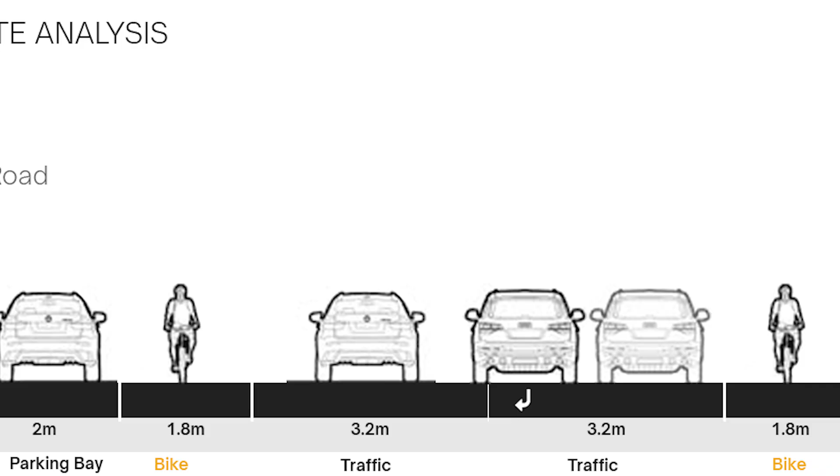Swinburne's Hawthorn campus is a key victim of this issue. Students who wish to cycle to uni find it inconvenient as they must navigate through busy streets and fast-paced intersections. Unprotected bike lanes are common. These lanes provide little separation from traffic as they are placed in between roads and car parking. From observation, narrowed cycle lanes create pinch points and hinder the experience of cycling. It causes drivers to unintentionally pass closely, which is dangerous and intimidating for new bicycle users.

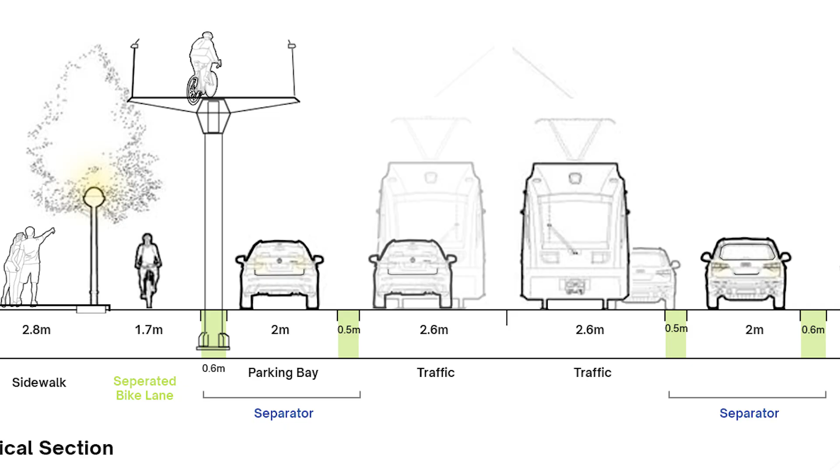Although using a buffer can alleviate this issue, one drawback with unprotected bike lanes is that they are simply painted, which does not stop people from parking or moving on them. This project addresses improving the experience of cycling within the urban environment by applying proposals to the physical infrastructure in order to create a dedicated, continuous cycling route.

The area around Swinburne campus relies on a few north to south travel corridors. Railways and train stations create bottlenecks. Major roads have limited safe crossings around intersections. This results in a disconnecting cycling network, so people naturally default to cars. In addition, the surrounding streets prioritize cars over bikes, creating unsafe corridors for cyclists to travel to campus.

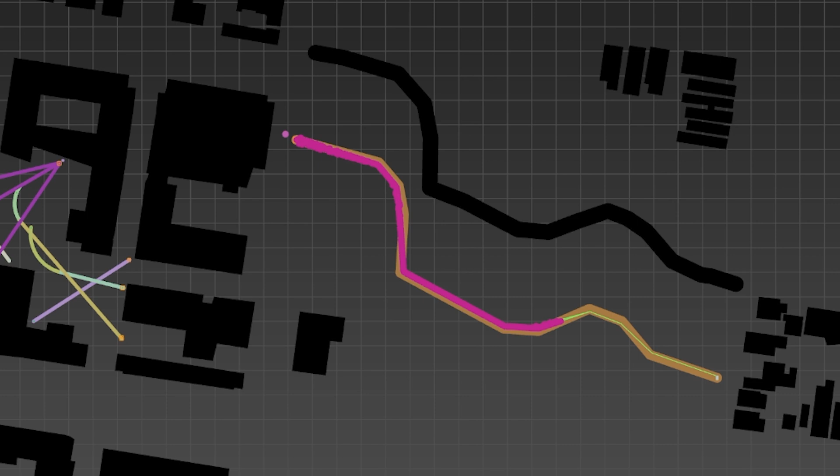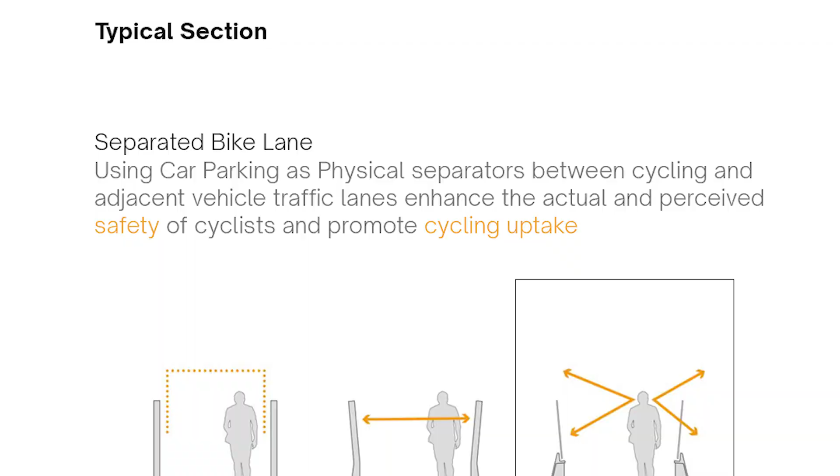Furthermore, utilizing data from Bike Spot's archive map, we found that there is only one existing bike path towards Swinburne campus, which is located in the Central Gardens. Our aim is simple: to come up with two actionable, modular solutions that can cater towards local and main streets. These modular solutions act as protected travel corridors, making cycling around Swinburne campus safe, easy, and efficient.

In order to achieve actionable solutions for the current cycling route network around campus, we use PedCatch and tyFlow analysis to evaluate accessibility and travel efficiency and to highlight the precise issues that cause an inefficient bike network using real-world data.

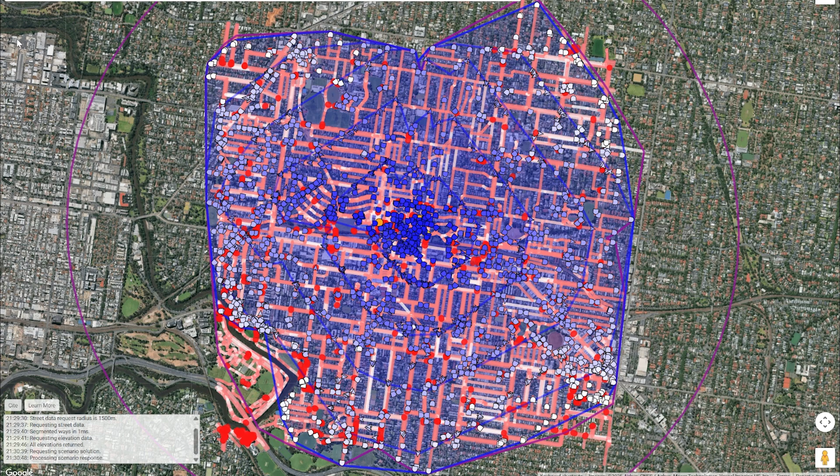Starting with PedCatch, we choose 3 different entry points to the campus to visualize the maximum travel times from each destination. We then simulated every single possible path from campus within a radius of 10 minutes and a velocity of 4 meters per second, which is a typical city cycling pace. This helps us to understand how far and how quickly cyclists can reach these destinations.

Through this simulation, we also use QGIS to create a new layer with deleted unprotected cycling paths so that we can get the results and analyze how existing conditions affect cycling accessibility. Furthermore, we also identify areas where steep gradients and physical barriers significantly slow down cycling movement.

Continuing with the analysis, we used tyFlow pathfinding simulation within 3ds Max to pinpoint the exact issue behind Swinburne's fragmented cycle network. We achieved this by utilizing data from PedCatch and by simulating bike velocities across multiple potential journeys to campus. After choosing 4 main entrances into Swinburne campus, we mapped out 3 potential cycling journeys for each entrance within a 10-minute radius. We then visually simulated this journey using tyFlow, assuming the same velocity for each path.

This allows us to visually prove the quickest route towards campus, covering main, side, and local streets. The 3 different path colors indicate the quickest to slowest route, from green, orange to red. The red circles scattered across the simulation indicate a busy intersection.

These circles were informed by a PedCatch analysis, but when applying it to the tyFlow simulation, it is clear that the shortest route to campus had the least amount of busy intersections, and vice versa. It then became clear that the main culprit behind slow cycle routes towards campus are busy road intersections. This became the crux of our design solution.

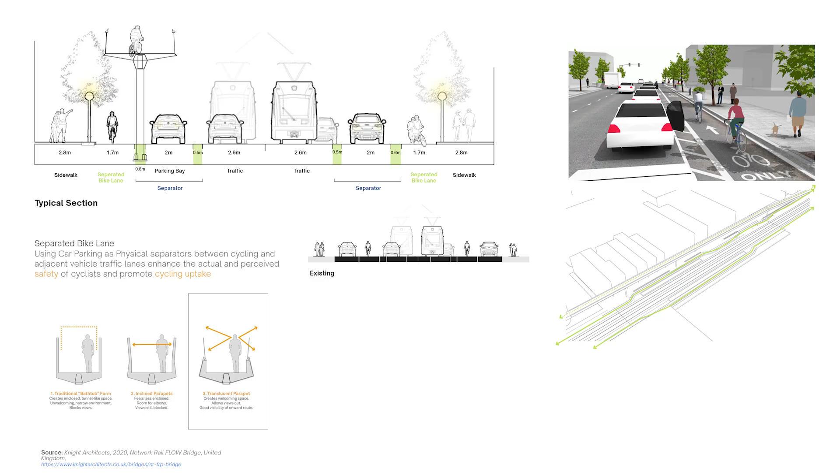We have started by redefining Glenferrie Road as a people-centric corridor that directly supports accessibility. The first attempt is moving parking outside for physical separations. This design places the bike lane next to the sidewalk, with parked cars acting as physical barriers against traffic, reducing car risk up to 53% when using low-cost delineators.

In addition, we also apply multiple micro-scale urban design solutions to generate novel design interventions, including dealing with the conflict points by designing a tram stop with prioritized pedestrian access to trams. The use of sensorized elements and changes in surface treatments respond to kinesthetic senses. Adding street furniture enhances the visual richness, and equipping the cross-section with planting strips makes the surroundings more imageable.

The first is mostly an application of urban design qualities through use of various street elements that prioritize the safety and the overall experience of cycling.

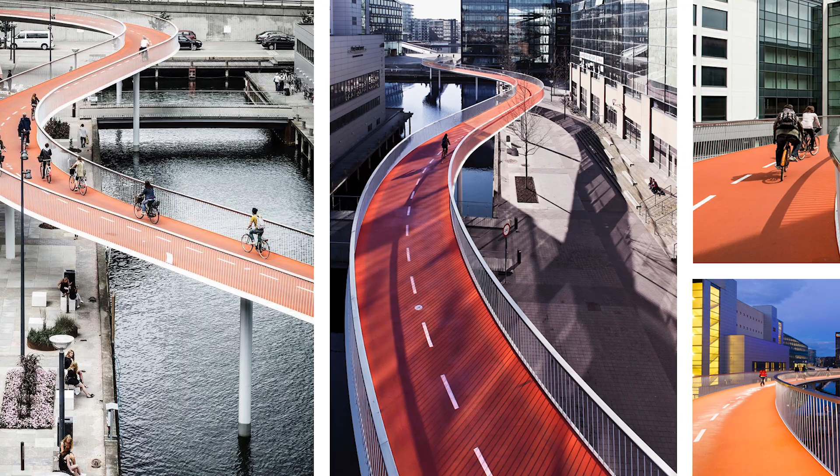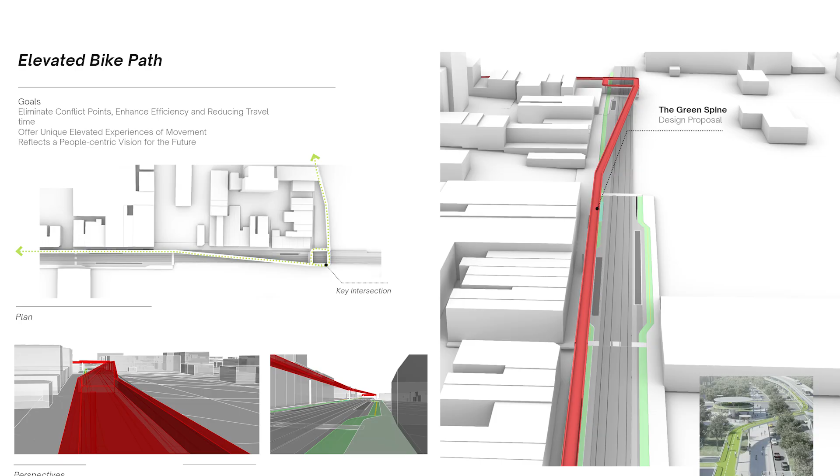In this stage, we were inspired by the precedence of elevated cycling paths in Copenhagen. Building on this, our project further proposes a green spine that passes through key intersections and connects directly to the Swinburne campus. By lifting cyclists above traffic and tram lines, this design eliminates conflict points, reduces travel times, and offers a unique elevated experience of movement through the heart of Hawthorn. This elevated green spine not only enhances efficiency, but also reflects a people-centric vision for the future.

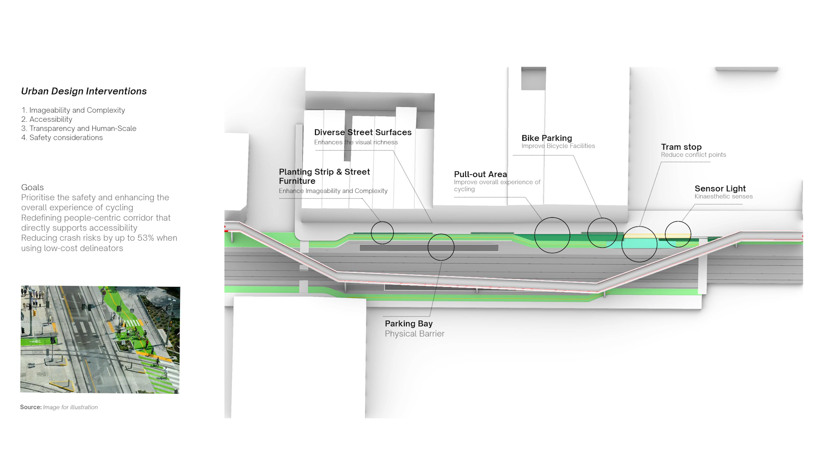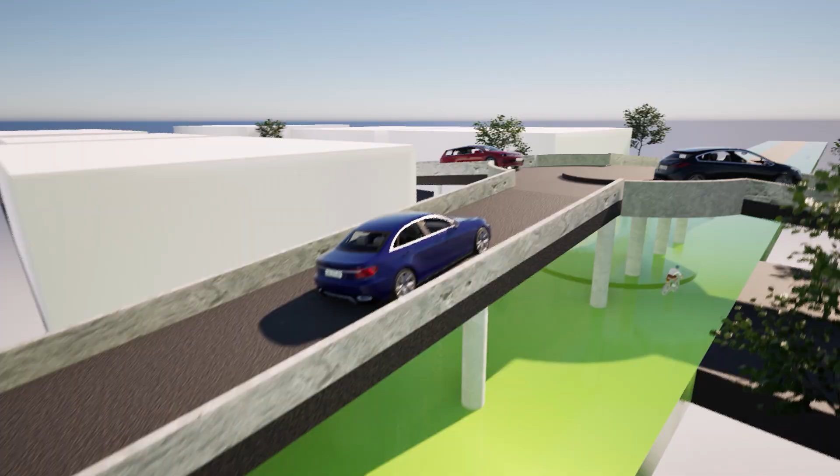Currently, many intersections along the route are unsafe for cyclists due to the absence of dedicated bike paths. Cyclists are forced to share lanes with vehicles, leading to conflicts, reduced safety, and longer travel times to campus. Our proposal introduces elevated roundabouts where vehicle traffic is diverted onto a raised overpass.

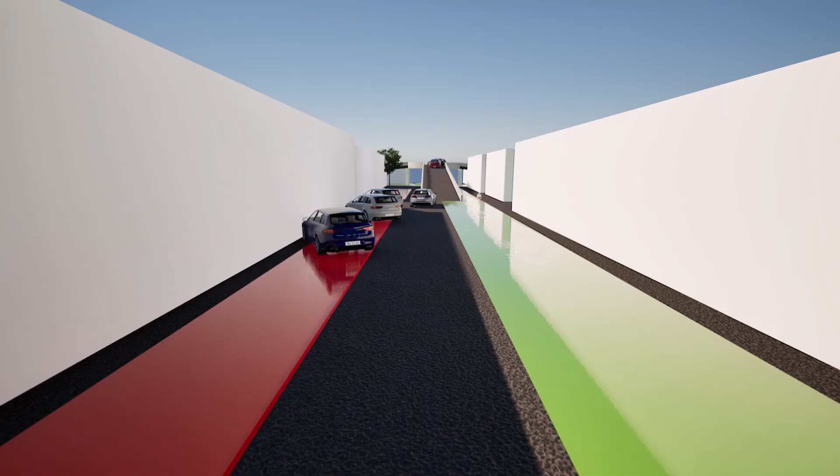This allows the street underneath to be dedicated exclusively to cyclists and pedestrians. By separating the movement of cars and bikes vertically, the design significantly reduces points of conflict, enhances safety, and ensures smoother, faster travel for cyclists.

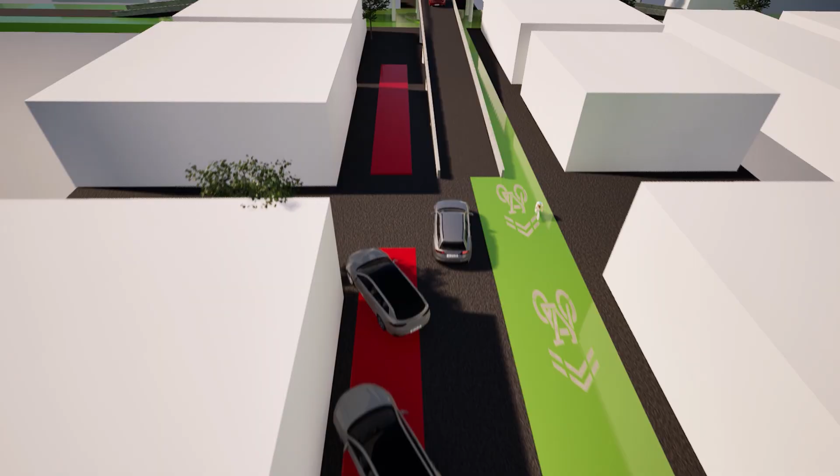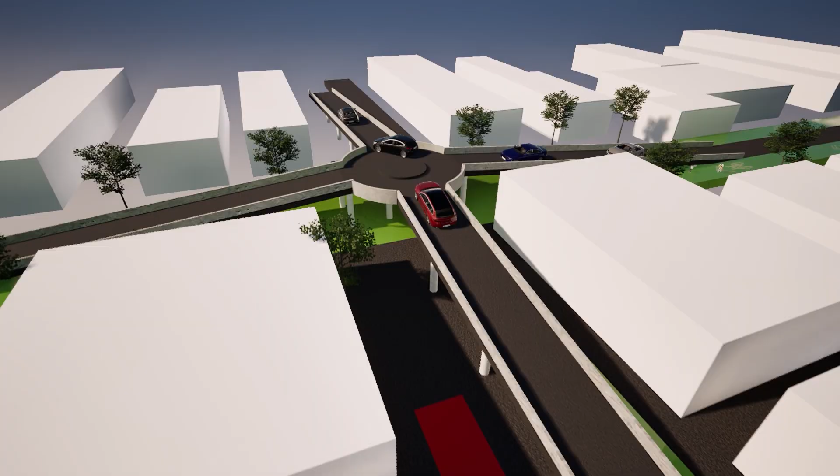This intervention mainly seeks to convert local car-oriented streets to favor cycling. This includes reducing the number of lanes from 2 to 1, reducing car parking widths, and also the width of the road, while allocating at least 4 meters towards cycling and pedestrian traffic. This change integrates a protected cycling corridor, whilst minimizing car allocation to local streets.

This design not only improves efficiency and reduces travel time, but also encourages more students and staff to choose cycling as a sustainable and reliable mode of transport to the campus. It also provides a safe space for cyclists around street intersections, making their journey to Swinburne campus safer and more efficient.